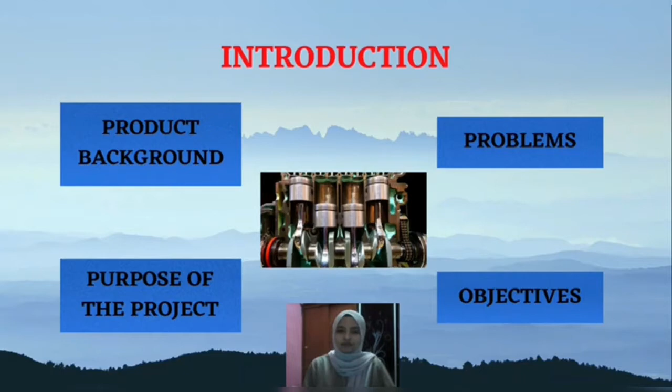It is made up of multiple components and operates in a harsher environment. It is also more substantial and constructed of metal.

The piston of an automobile engine is built of material that can handle pressure, instant heat, and a variety of circumstances.

Next, the problems. The piston is one of the most crucial components of an engine. A company that manufactures pistons is experiencing piston failure owing to insufficient heat dissipation and failure owing to high combustion pressure.

As a result, it must be engineered to withstand damage produced by the combustion process, high heat, and pressure.

The objective of this project has three parts. The first one is to study and understand the structure of the engine piston in the manufacturing process.

Next, to define the material that will be used to create an engine piston. And lastly, to determine how much energy is required in the manufacturing of pistons.

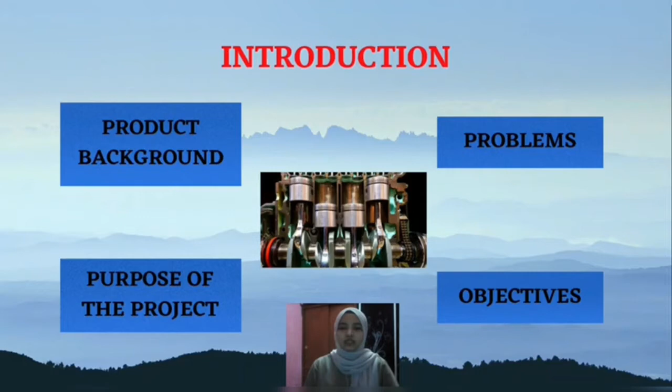In this video, I will explain a little bit about the material and design of piston, starting with the material for piston. The material and design of piston have an impact on an engine's overall durability and performance.

The majority of pistons are constructed of aluminium formed in a mold. Cast aluminum alloy is lightweight, has high structural integrity, and is inexpensive to manufacture.

Aluminum's low weight reduces the overall mass and force required to begin and maintain piston acceleration. Aluminum alloys are also the chosen material for pistons in both gasoline and diesel engines because of their unique properties, such as low density, high thermal conductivity, ease of machining, great dependability, and excellent recyclability.

Chemical composition, process conditions, and final heat treatment are carefully controlled to produce a microstructure that provides the needed mechanical and thermal performance, particularly strong thermal fatigue resistance.

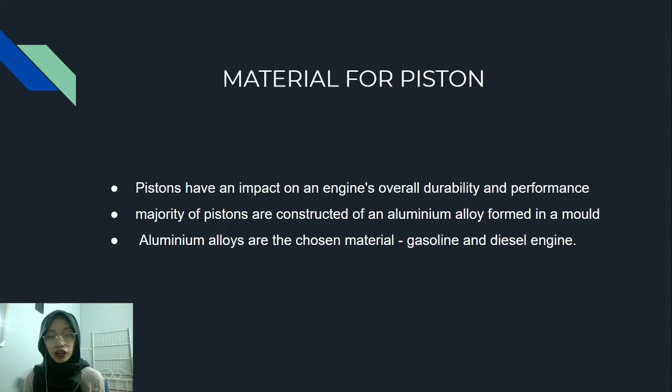The next one is the design of the piston head. Pistons have features that perform specific functions when the engine is running. The majority of the initial pressure and force generated by the combustion process is applied to the piston head or crown.

Due to rapid directional change, the piston pin area is subjected to a significant amount of force.

Piston head consists of five components. The first component is the crown, the second is the ringland, the third is the oil ring groove, the fourth is the skirt, and the last is the piston pin boss.

The crown is the upper surface of the piston closest to the cylinder head, and it is subjected to tremendous forces and heat during normal engine operation. The ringlands are the relief cuts into the piston side profile where the piston ring sits.

The third one is the oil ring groove, a recessed area around the piston perimeter that is used to keep a piston ring in place.

The fourth one is the skirt, the part of the piston nearest to the crankshaft that helps piston alignment as it passes through the cylinder bore.

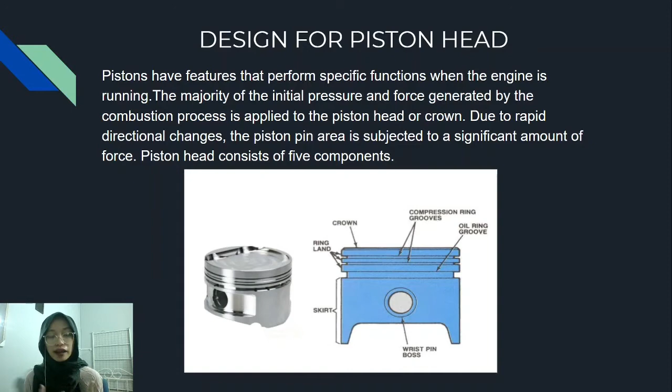And the last one is the piston pin boss, a bore that links the small end of the connecting rod to the piston by a piston pin.

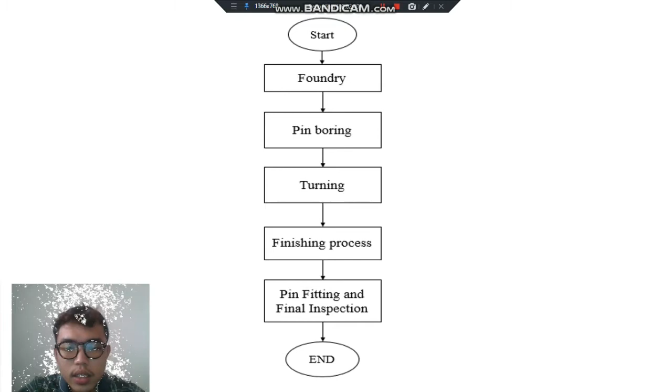And for the last one, pin fitting and final inspection. The piston is then cleaned and fitted with a gudgeon pin, and sized and categorized before being dispatched. That's all for the explanation of the flowchart of this process.

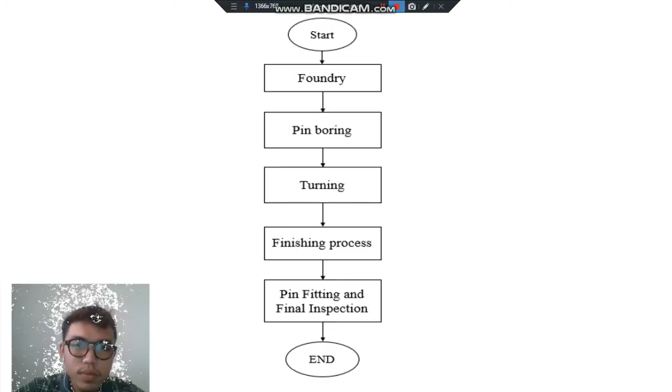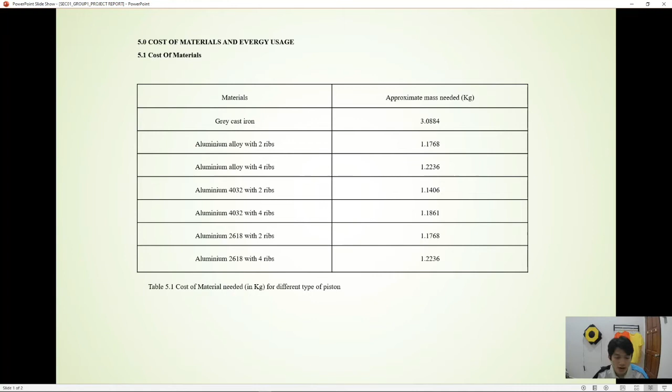Next is the energy usage by each machine. The oven can use up to 800 kilojoules, which is equivalent to 0.22 kilowatt hour, to heat the aluminium alloy to 700 Celsius, which is the melting point of the materials. Next, to operate a lathe machine, it will usually use an average of 3.2 kilowatt hour, considering it takes an average load of 40% for 4 hours a day.

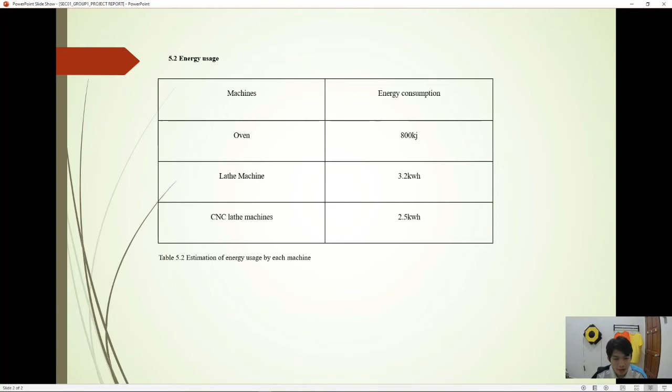Finally is the CNC lathe machine, averaging around 2.5 kilowatt hour to operate. Of course, all the numbers can vary a lot depending on the types of the machine itself and also the design and material of the piston used.